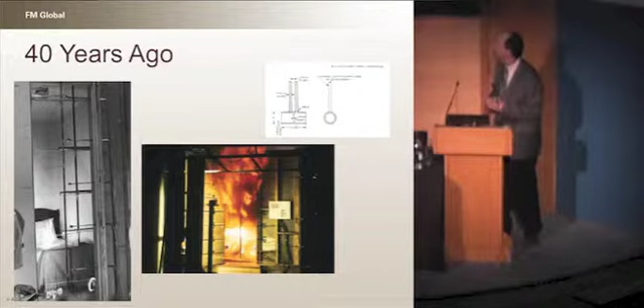I'm not going to try to go through an exhaustive review of CFD fire modeling. Instead, I'll mention that about 40 years ago, a set of experiments were done called the Harvard home fire experiments. They were the basis for the first well-known zone model, called the Harvard zone model. So what I'm going to do is talk about where we are as a company since then.

At that time, this is what our research facility looked like - the FM Global Test Center out in the woods of Rhode Island. This is what it looks like now. It's a little bigger, a lot busier.

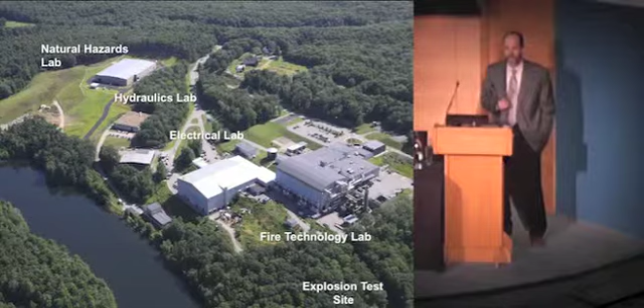The reason for that expansion is that fire protection today, whether in our standards or any other standard, is still largely based on full-scale tests. That's the way it is - you want to set a fire protection standard, you have to set it up, build it, burn it, and show that it works.

So here's the challenge: taking a simple thing like warehouse storage, if you look at all the variables involved - different ceiling heights, materials stored, aisle widths, how those things can be configured - and I take my most productive year at this facility, where we did 300 large-scale fire tests in one year, and look at all the variables in this problem, it's going to take 35 years to do all those tests if I do one for every possible combination.

That's not sustainable, right? So the way we do it now is we test what we can, use judgment, try to fill in the blanks, but the challenge is that industry's moving forward a lot faster than that. New things are being stored in new ways, in new buildings with lighter construction, more plastic, and we've got to stay on top of that problem.

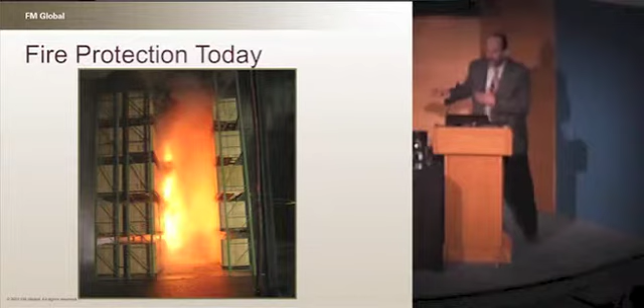Okay, so that's really our motivation for doing fire modeling. And the work you're going to see here is not mine. If I use the restaurant analogy, which I've used in the past, you're not getting the master chef talking to you about the meal. The master chefs are all at another meeting in Norwood, Massachusetts. You're getting the guy that printed the menu. All right, so that's the message. I'm presenting the work of a lot of other people. I won't be able to acknowledge them all along the way, so just go into that with that understanding.

So the goal is to perform better tests. The first thing we did 9 years ago when we were looking at this problem was improve our experimental test quality. We're the only large-scale test facility that controls moisture content of the material very tightly. Makes a big difference. We made a lot of improvements in terms of our test quality. The goal now is to be able to do fewer tests and do them smarter, and of course, provide deeper knowledge, engage and advance the community.

About 9 years ago, I did kind of a survey of all of our academic partners. Edinburgh was one of them. And I really took a message home from Edinburgh that stuck, which is I heard from Jose and his colleagues that what they really need is a platform on which to do fundamental research where they can publish their results in high-quality journals. I compare and contrast that with what John said this morning, which is there's hundreds and hundreds of tests and correlations on a certain problem, but there's not a lot of knowledge on it. So we need to move beyond that. We need to engage and advance the community to improve the rigor and fidelity and the trajectory of making advances in fire science.

So that's part of the underlying driver for what we're doing here and kind of our strategy. And then ultimately to provide better protection. And better in this case means not only does it work, but the big issue for any kind of fire protection or fire safety issue is cost. Very rarely are you going to improve a commercial industrial property owner's profitability by a better protection system in the short run. In the long run, absolutely you will. Not only will they have fewer losses, they don't have the deductibles to pay, they don't have their insurance issues to deal with, they don't lose market share, they don't lose shareholder value, they don't lose employees, they don't end up in the nightly news, all those things that go along with reducing losses. Those are long-term benefits. The short-term challenge is how do you provide that protection cost effectively?

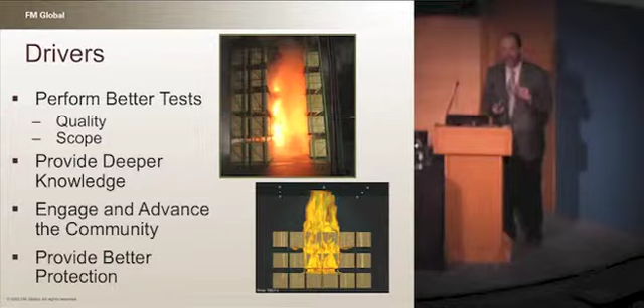So hopefully I set the stage for the fire modeling program we put in place in 2008. We made investments in staff and scientific computing. Our board of directors approved it. Our fire modeling objective was to reduce the number of large-scale tests needed to protect some simple storage. Basically what we call Class 2 commodity, which is a metal box with 3 to 6 layers of corrugated container board around it. Corrugated container board is a nice way of saying cardboard. So it represents an appliance being shipped or stored in a warehouse. Then down the road, we want to be able to have some predictive modeling capabilities for some applications. Not everything, but for some.

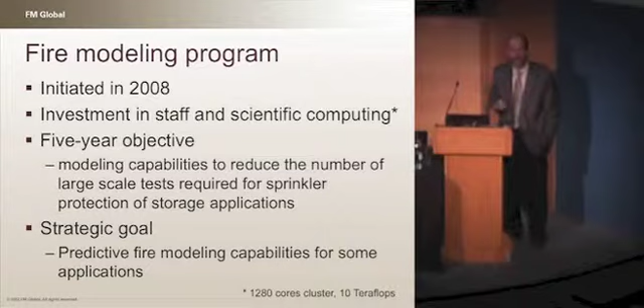So at the time, we looked at the challenge and the team that was responsible for this. Obviously, it's multi-physics, multi-scale. I don't need to go through that for this audience. But the basics is we need to calculate the fire growth and we need to calculate the efficacy of different protection strategies. And we started by just tackling the simple warehouse problem, just because of the magnitude that I talked about.

Now, it's not like we're burning down warehouses every day, thankfully not. Part of the reason for attacking that problem is it's pretty well defined in scope. It has a lot of the features of key geometry. There's a lot of business value in warehouses. When a company loses their warehouse, they have to overcome that. We have a lot of things that we ask our clients to do to protect their storage and warehouse that's a hassle for them. So if we can alleviate some of those issues, then we're ahead of that. And it's also just a good canonical problem to start with, a little simpler. So that's where I'm going to start.

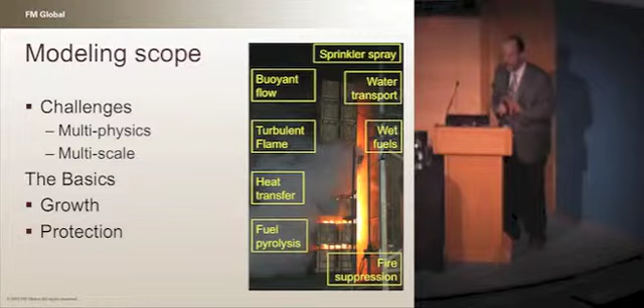Warehouse is not the end goal, but that's certainly our starting place. At the time, we used FDS and commercial codes, a number of different commercial codes. So we had a first strategic decision to make: were we, in accomplishing those goals, going to try and build upon those, or do something different? This was a big driver.

If you look at computing performance, you've probably heard of Moore's Law, and it's really played out. You can do now on your laptop what used to take a supercomputer to do. It's not slowing down.

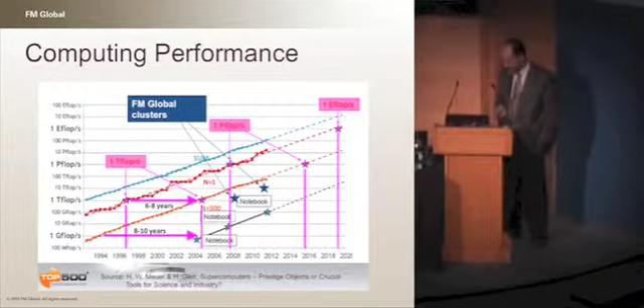We didn't want to build something for today, we wanted to build something for the future. Computing was not the big issue for us. We're not going to build something that runs on a laptop. Our strategy is that you, the students out there, are going to have computing resources that far exceed anything we've ever had, and we don't anticipate that's going to slow down. So we're not limiting our strategy to a laptop, and discussions moving forward shouldn't be limited to that context either. We need to think beyond that. This is the trajectory we're on, and it's showing no signs of slowing down.

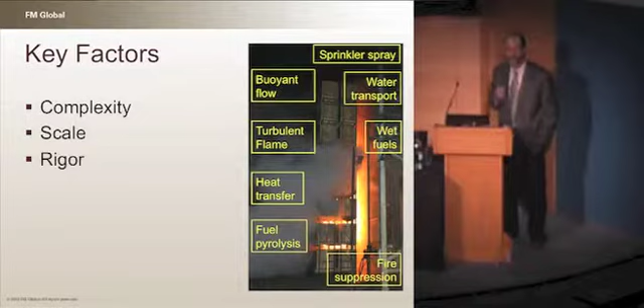The other key factor is complexity. Obviously we want to move beyond warehouses. Even a warehouse is tens or even hundreds of thousands of square meters, so we need to represent that size. And the rigor from a scientific perspective, all the physics we need to capture, requires a higher fidelity model.

So we chose to start with an OpenFOAM toolbox. This was developed by Imperial College, and it's supported by OpenCFD, available through OpenCFD. Our strategy was to develop the key models and call it FireFoam. I wanted to call it OpenFire, but people thought that sounded bad, so we ended up calling it FireFoam.

The idea was only to develop the key submodels needed to build upon that platform, which has a very good solver, a set of solvers, a maintenance program, and availability, to accomplish those objectives: better protection, moving the community forward, and being able to solve the kinds of problems we need to solve in the future.

It also gives some acceptance, and helped our cooperation with academia and industry. We didn't have any licensing agreements, we have this model available. If you go to fmglobal.com/modeling, anybody can download it. Our folks here at Edinburgh can develop submodels for it, as they have in the past.

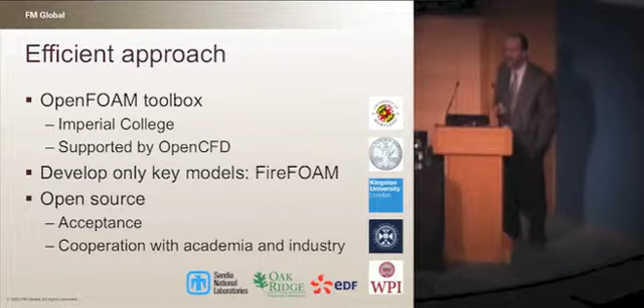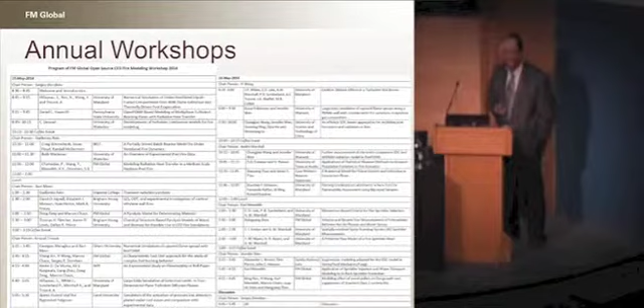So that was our strategy in terms of moving forward with making a selection for a fire model. We have annual workshops. Unfortunately, or maybe fortunately for me, this year that workshop was announced on the same day as this meeting, so all the folks that do the heavy lifting are at that workshop instead. So I get a chance to come here, hang out with you, have a nice dinner, and learn a lot. But that's where the knowledge is shared between the community working on moving this model forward.

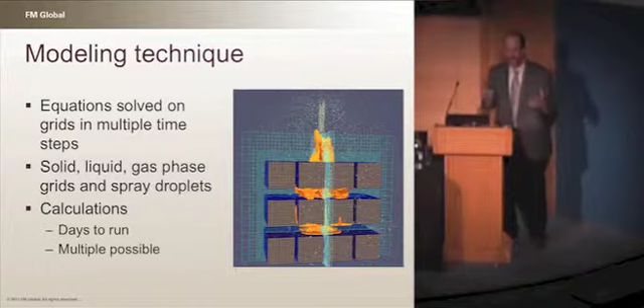The rest of this I'll go through pretty quickly. It's a CFD model, equations solved on grids and time steps. We use separate grids for the solid, gas, and liquid. The spray droplets are modeled using Lagrangian transport. Right now, for a warehouse calculation, it takes on the order of days to run. We have about a 12 teraflop machine, but the nice thing is you can run 4 or 5 scenarios at one time, so in a few days you get an ensemble of results you can use to make decisions.

Our milestones are as follows: we started with the buoyant plume.

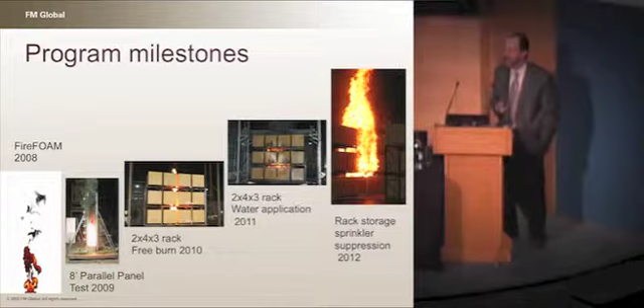Then we used the 8-foot parallel panel test in 2009. Then we used a simplified 2x4x3 rack storage, free burn, in 2010. Then some free burn with water application at a prescribed rate on top, and then the rack storage sprinkler suppression. I'm going to walk you through these, kind of how we did along each step.

We use a pyrolysis model that's built on the FPA, basically fuel properties from bench scale. We have a material decomposition modeling approach that was developed in part here at Edinburgh. And then the validation for fire growth is in the parallel panel and in the rack storage case.

So this is an opportunity for those of you developing models to develop them in a way that allows them to be used by others. Developing pyrolysis models in some standard way helps those models to be used by others for calculations using the same material.

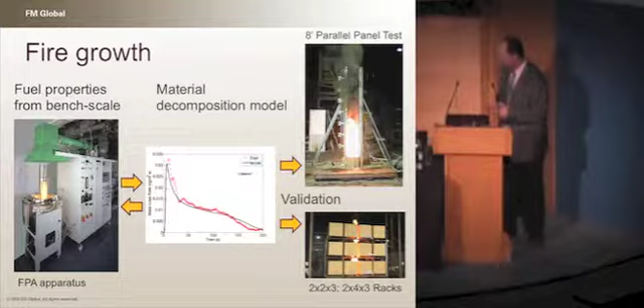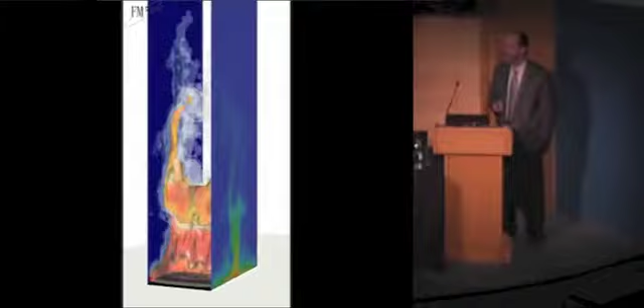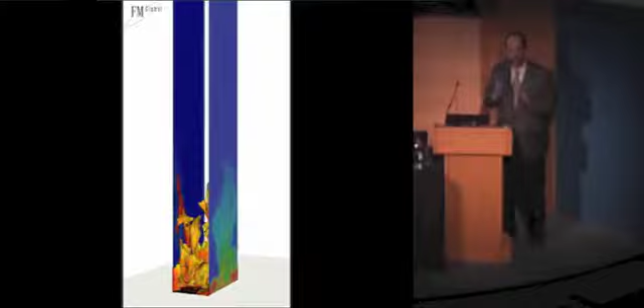The parallel panel test is an important one for us. This really captures one of the things Patrick was mentioning. This is the way we started testing and certifying wall panels. We used to use a big corner test, a 25 by 50-foot corner test. We don't do that except in very rare cases now. This is either an 8-foot or 16-foot setup, two panels put together facing each other, which replicates the radiative environment of a corner.

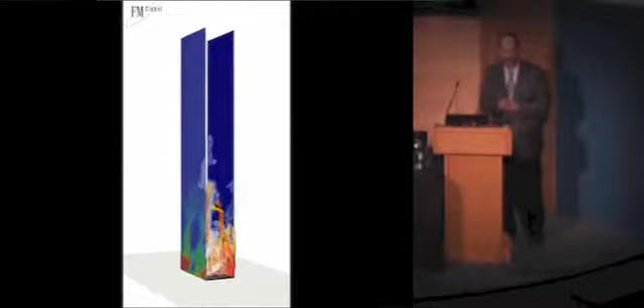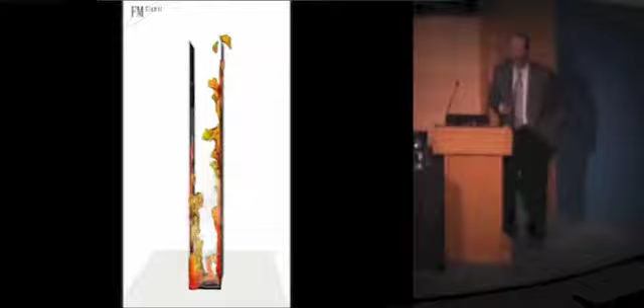And you can put the seam of a sandwich panel right in the center, so you can capture those kinds of things. It's easy to capture in terms of boundary conditions—it's a simple geometry, well-controlled boundary conditions, a good canonical problem. You can see how we started off just modeling flame spread through parallel, clean geometries.

Our next step was to be able to do rack storage. So we developed the basic pyrolysis model for corrugated container board, then applied it in a more complex scenario. You can see the tests—there are two different configurations. Tests on the right, model on the left.

The first thing is the view graph test, right? The first is view graph validation. If it doesn't validate on view graphs, it's not going to validate in numbers. So this is necessary but not sufficient for validation. You can see the flame spread rates are about right—the propagation of flame through the material is about right.

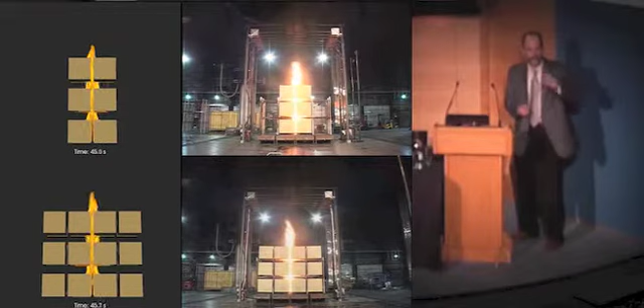This is what we call simplified class 2. It's basically boxes sitting on single points, so we don't have the complication of the heat sink back into the rack. I'll talk about where we've gone beyond that in just a minute.

You see that the basic flame structure is okay. What we're rendering on the left-hand side is the envelope of the mixture fraction space needed for combustion, so we get some fairly good view graph norm comparison. And the heat release rate, at least the fire growth rate, is pretty good.

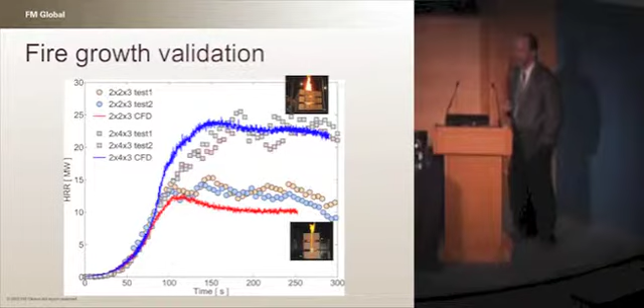Now, later on in the fire, when you start to get a lot of geometric changes, the comparison breaks down. But for us, in terms of looking at effective protection, the most important part is that initial growth phase. That's the key part to capture, because that's going to determine when sprinklers activate and how effective they're going to be.

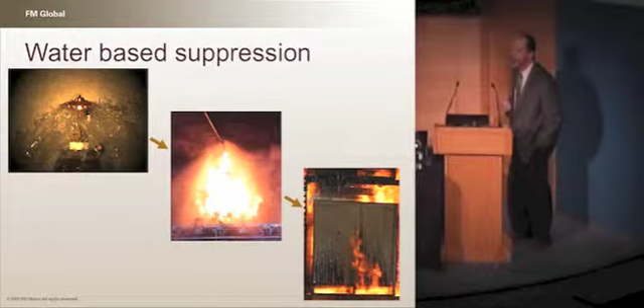So the next step is to use sprinkler protection as the first metric. It's still the most widely used protection mechanism specifically for warehouses. The idea is to look at the sprinkler discharge, the discharge of those droplets through a flame zone, and then look at the transport of that water onto some burning material. Those are the three basic steps required.

We used a technique, working with the University of Maryland, to characterize selected sprinklers—basically getting the flux, the droplet size, and the number density with a combination of collector pans and laser diagnostics. That allows us to track the droplets through the domain. So we don't try to go up to the sprinkler itself; we draw a boundary around it on the order of 0.5 meter in hemisphere, then specify the flux and those parameters at that level, and track the droplets using a Lagrangian particle tracking technique through the space.

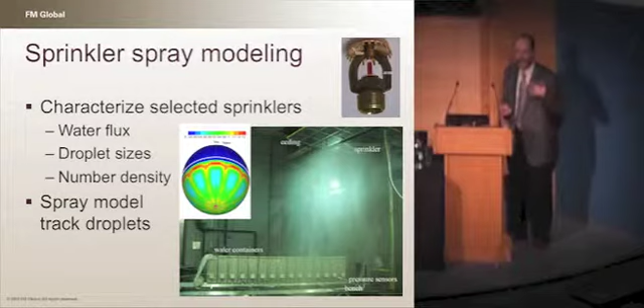So you have a K14 sprinkler at some pressure. You set it up, make this measurement, and that is what goes into your model. The first validation was: can we get the actual delivered density correct? This is the density that gets through the flame zone to the top of the burning material.

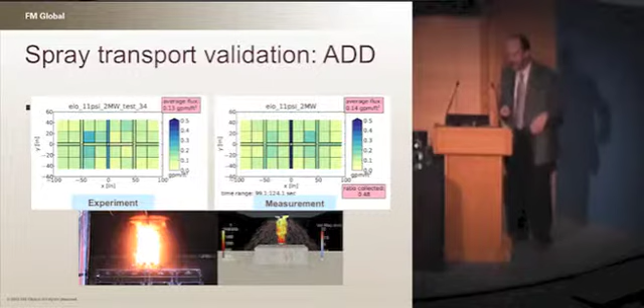You can see the comparison here of experiments and measurements. That's basically testing the Lagrangian particle tracking algorithm, the evaporation algorithm.

The hardest part of this, and we knew this to begin with, was going to be what happens when the droplet hits the material. What do you do then? There's a fair amount of different options there, a fair amount of physics there. None of them are necessarily new physics, and I think this is characteristic of fire protection engineering in general. There's not a whole lot of new physics. It's just a combination of physics and the complexity that makes it challenging.

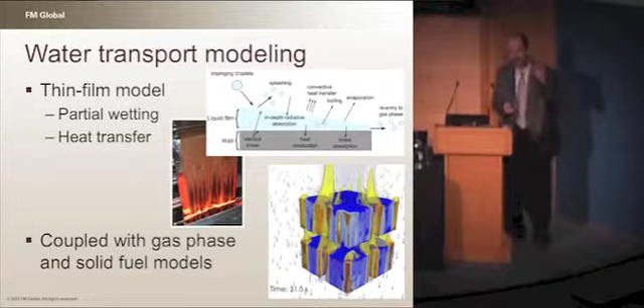So we looked at partial wetting and the heat transfer from that with a thin film model, and then coupled that with the gas phase and solid fuel models to see what happens after a droplet hits the surface, partially wets the surface, then where does it go next? There's kind of three basic cases: the thin film flow, which is a Nusselt solution, the partial wetting, which happens when that liquid starts to evaporate, surface tension pulls it together in rivulets, and then there's the transport from tier to tier.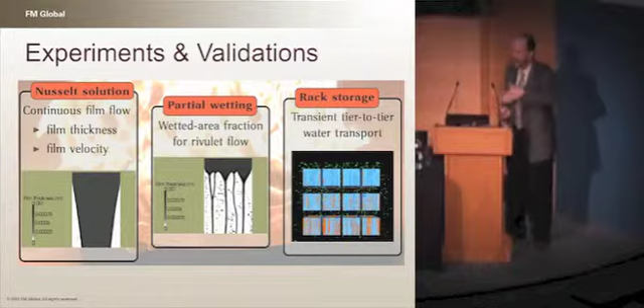So if I have water flowing down the face of a box, what happens when it gets to the bottom? Some of those droplets, by surface tension, attract and go along the bottom. Some of them go some distance and fall down. Some of them drip down. Some of that water just washes down.

So here's the combination of the models that were put together by Karl Meredith. He's actually our technical team leader for the fire modeling. He has reports to a group manager, Yi Wang, and Sergei Dorofeev is the area director for this area.

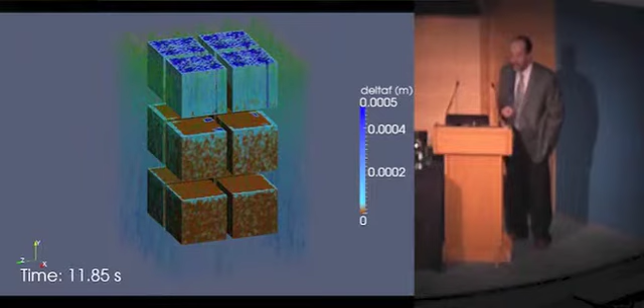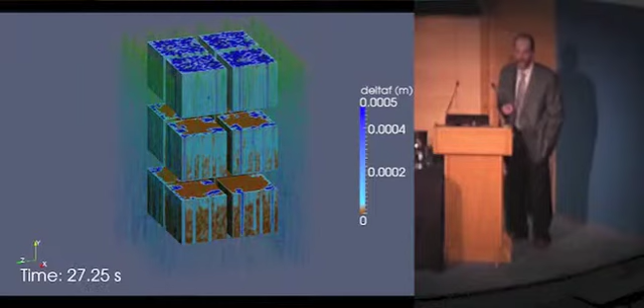So you can see the droplets, and this is a prescribed flux of droplets hitting the depth of the water layers represented by the tones here. You can see the pooling on top, the transport over the corners, the rivulet flow down the side, and the dripping off the corner.

And so we validated this for a number of steps through some intermediate scale experiments, as well as some kind of combined experiments. And just like the home fire project back 40 years ago, where they did experiments for discovery, then they developed a model, and then they did more experiments to compare the model. Basically the same approach for all these.

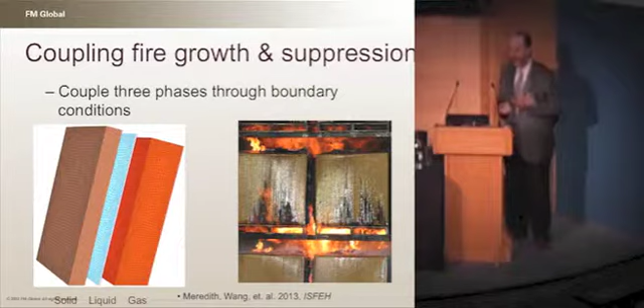We use three different meshes. We have a mesh for the solid that does the heat transfer, a mesh for the liquid that does the thin film transport, and then, of course, the gas mesh for the fire itself.

So here's when we put it all together for a simple material. Here's what it looks like. We have two different sprinklers in this case. We use a sprinkler activation model, which is a simple heat transfer model. You can see the little dots up on the left in the model. Those are our sprinklers installed in the ceiling. We just calculate the convective flow and use the response time index to trigger when those sprinklers are going to open.

So it's very similar to the fire growth case you saw before, but now you're going to see sprinkler activation, for a couple different sprinklers running at different pressures, and the transport of the droplets and the effectiveness of those droplets in terms of achieving fire suppression. So it takes a few minutes to develop. You can see that a sprinkler at the top, which is a K14 ESFR, it's an early suppression fast response pendant sprinkler. You can see the droplets.

That windowing or the striping is a rendering artifact, a consequence of the rendering. That's not a calculated feature. You can see it's like pulsing, the spray looks like it's pulsing. You see the transport down the boxes, the rivulet formation, and you can see it really in both cases. The test is a little harder to see because the rivulets are a little more difficult to see with the glare from the light.

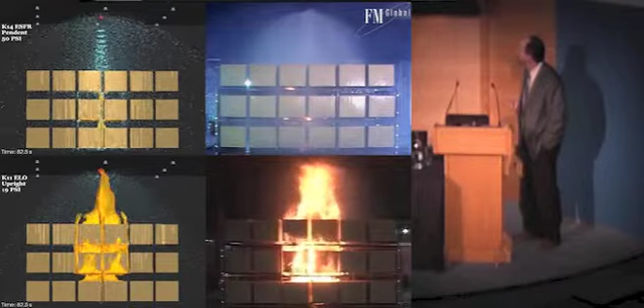Subsequent activation then has not occurred. Actually, you can see that one K14 ESFR is controlling the fire quite well in the top. But you will see subsequent activation on the bottom, which is the K11 ELO running at a little lower pressure.

The one thing we haven't tackled here is sprinkler skipping: the advection of the droplets from one sprinkler to another sprinkler and wetting that sprinkler link. We haven't tackled that problem yet. That's something we need to tackle, or the community needs to tackle, because what it does is drive up protection requirements.

When you put a safety margin in to account for the fact that those sprinklers are going to skip, it drives up protection requirements, so you see additional activation down below. We basically compare heat release rate, sprinkler activation rates from tested experiments as the ultimate validation, numerical validation. Of course, the first thing is, do you get suppression in one case and not suppression in the other?

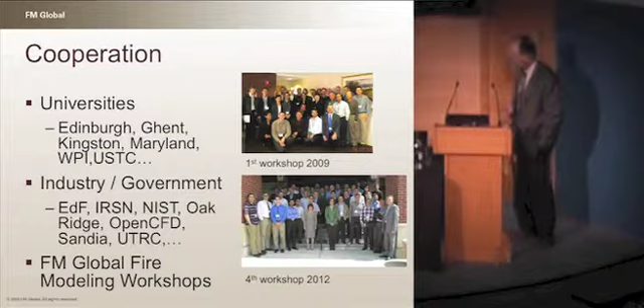This is the strategy we've taken to start test planning now. When we're looking at these materials, we'll run pre-test calculations. We also use statistical design of experiments to map out the test matrix. Our cooperation involves too many folks to mention, but these are the folks that have traditionally been involved in the workshop. There was the 4th workshop in 2012, the 5th workshop, and we're on the 6th one this year.

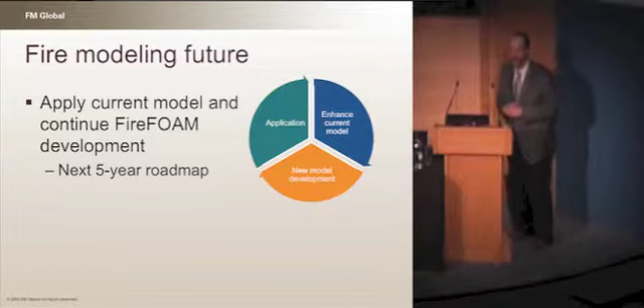So in terms of looking forward, what are we doing now? What are the opportunities for this group, and how can we best work together? We've completed that 5-year plan. We have the ability to model fire and suppression in simple warehouse configurations, reducing our test burden there. We're going to split our next 5 years based on applications, which I'll show you a few of, enhancing current models through research opportunities, and new model development for physics pieces that aren't there yet.

One of the challenges we face now, as a community, is the notion that space is important, and when space footprint gets important, what happens? People build up. So we now have materials stored in 60, 80, 100-foot tall warehouses, whereas 5-10 years ago that never would have happened. Our research campus, which I think there's one at TFRI that goes a little higher, is the tallest large-scale test facility regularly operating, at 60 feet.

So we're going to need to extrapolate protection to those levels, specifically in things like roll paper, where you can't mount them in racks and put in-rack sprinkler protection on it. In-rack sprinkler protection is the second option for warehouse storage, but nobody likes it except sprinkler manufacturers. They sell more sprinklers that way, but clients don't like it, warehouses don't like it because they get hit with forklifts. There are all kinds of issues associated with them getting broken off, plus additional expense, both in installation and maintaining the water supply.

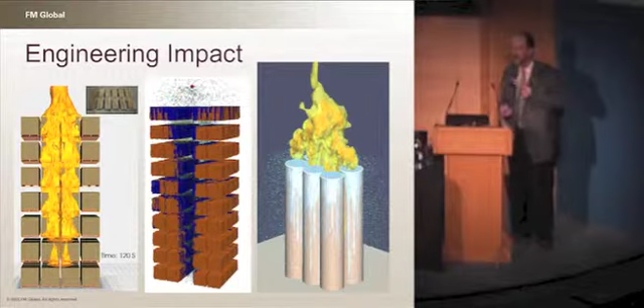So design of in-rack sprinklers, testing of roll paper, whose properties were developed using the same approach, is some of what we're working on now that will go into protection measures for those applications. We'll do design of experiments, limited tests, validation, and they go into protection in our standards.

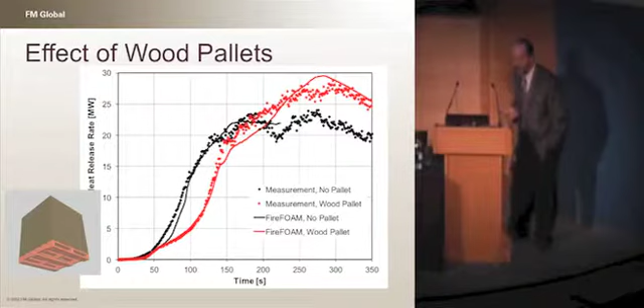One of the things we just recently achieved, which I skipped over a minute ago, was adding the effect of wood pallets underneath the material this year. It's kind of interesting - if you look at the plot, the red line is the fire growth rate with a wood pallet. It turns out if you just put the bare box without wood underneath it, that corrugated container board, that cardboard, ignites very quickly and produces a lot of flame spread across the bottom. The wood pallet initially lowers the fire growth rate. Now, later when that wood gets involved, you see the heat release rate go up. That's something that at first the folks plotting the data thought maybe they'd made a mistake. Higher storage I already mentioned - these are just comparisons of heat release rate with time, with modeling experiments.

One of the challenges we face is lighter plastics. This is what we call uncartoned expanded plastic. Lighter plastics are making their way into everything - things that used to be metal are now plastic. The lighter the plastic, the higher the fire risk. So this is what it looks like for a typical grocery store meat tray. That's the mesh.

This is a high storage of that material with one row of in-racks at 30 feet. Currently our standards say that to protect that, you have to, every 10 feet, put in a row of in-racks. So we're trying to see if we can push that limit and put larger sprinklers more strategically placed up at higher elevations to reduce the cost and burden for our clients.

Here's the way we're using that to supplement the model to supplement tests. We have a simulation of the water flux to the bottom of the tier. This is the water that gets to the seat of the fire - it's not the density at the top, it's not the design density. And we have tests that we've done where we just release water in the same fashion to the bottom and measure it in the laboratory, so no fire test, just to make sure we have the water transport correct.

That's really the root of the issue. If you get water to the right place at the right time, you're going to have effective protection. So, in the spirit of...

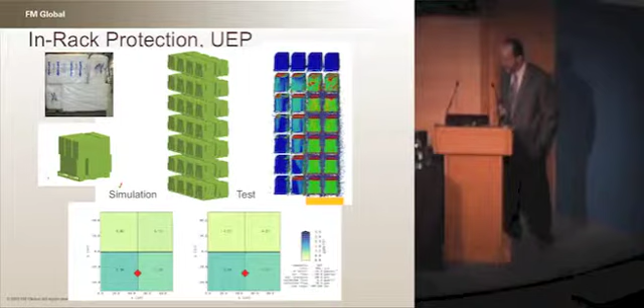The test is reality, partially revealed - because you do a test, you only get so much data. A model is a lie, because you're never going to represent everything, but it's fully revealed. You can dig in and find out what the problems are with your model by examining every variable in time and space.

And we can use this information and then go back into the laboratory and do intermediate scale tests to find out how much water we have to deliver to the bottom of that storage for us to achieve effective protection. So we do intermediate scale tests where we have a well-controlled application of water to the top of the storage, not sprinkler control, but well-controlled application of water to the top. And we define the threshold where you have an insufficient or sufficient water flux.

The good news is in the bottom, you can see there's a lot of deviation between insufficient and sufficient. So that means you've got a big threshold, you've got a nice wide place to capture. The top is a little harder, and so with higher storage, it becomes a little more challenging. Nonetheless, we can use this.

We go into the laboratory and test those scenarios. We've tested on both ends, and the ones that were predicted by this approach as being sufficient were indeed sufficient protection. The ones that were expected to be insufficient were insufficient protection.

Now, what we haven't done, because these are expensive, time-consuming tests, is go back and see how close we can get to the margin. With safety factors in place, which there should always be safety factors, and this being an academic problem, I'm not sure it makes sense for us to do that, but we certainly would like to know what the uncertainty is around some of those margins as we move forward.

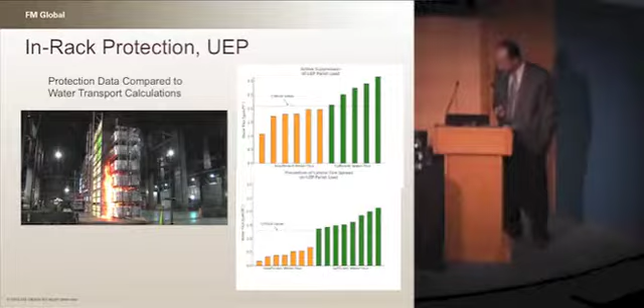So the benefits - hopefully what this kind of capability and this kind of approach and this strategy that we took, that everybody's a part of in the community, is reducing the number of large-scale tests for a specific problem. So with that in-rack storage application, rather than doing a minimum of 4 to 6 tests, we did 2.

We did all the calculations. We understand the density at the bottom. We did one that we thought was going to be okay and one that we thought was not going to be okay. And we have something that we have a lot more confidence in.

And of course, we can use that for maybe a little shorter, a little taller storage. We've used it to represent what happens if you pull a few pallet loads out - what happens if you have an open space? Is that better or worse? What happens if you increase the flue space or the aisle space?

So ultimately, better, more reliable protection guidelines - not reliability in the sense of systematic reliability, but reliability in terms of we have information that will lead us to a protection point which we can put in our standards and ultimately get adopted, hopefully by others.

Faster turnaround of support projects. We insure 1 in 3 of the Fortune 1000, everything from amusement parks to semiconductor fabrication facilities, and they come up with some weird stuff. So we have a tool that we can use to address some of those problems.

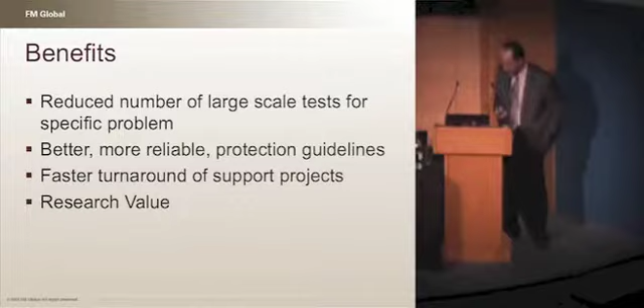That's certainly a benefit. I think the most important thing, if we think about it, is hopefully we do have a platform now, and the partners that we've worked with so far in the university here can see some research value. We see combustion and flame publications and things that are coming out, which is really the metric of success for universities and researchers. So we've seen that kind of come together.

This is the slide that I always end with. When I talk to audiences about this, they say, well, are you just going to model everything from now on? Well, the answer is no, I don't think so.

My tenure will not be as long nor as distinguished as John de Ris's, but in my tenure, I don't think it's ever going to happen. That's certainly not the plan. I think the goal is to complement test data, using the data as the truth partially revealed and the model as a lie fully revealed.

There's certainly a lot of value in being able to do things smarter. This is the strategy we've taken. Hopefully this group can see you were a part of that strategy, and you can see now the ability to carry that strategy forward. Be part of the research team that's developing capabilities, putting it in the model, and be part of the group of users that downloads the model and uses it, and validates it for their application, because the model's never going to be validated. The model is the model. When you apply it to a problem, you validate it for your application, and use it to meet their needs. So with that, hopefully I've left a couple minutes for questions.

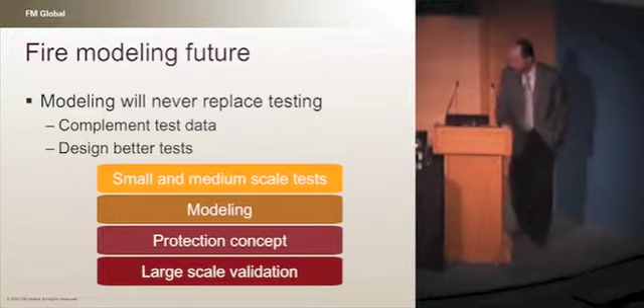My guess is at this point, you're still doing 300 tests a year, probably learning more than you did before. Has it changed your instrumentation? I know you mentioned that you're conditioning your cardboard now, and that's obviously an improvement. Have you changed other things in the way you do tests that came out of that?

Yeah, good question, Greg, and you're right. We've still got about a year backlog at the Large Burn Lab. We're still doing as many tests. So my commitment was never to reduce the number of tests in total.

And it has changed some of the diagnostics. It hasn't made its way to the standard tests that we use to test and certify products like sprinklers. But certainly in terms of the tests that we do to develop new protection measures, we're starting to take more velocity measurements than we have in the past. Taking temperature measurements inside the commodity, so we can start to assess the solid material response, and so it is pushing us to a better place experimentally as well.

And then we've done some simple kind of global things about test quality as well. I mentioned moisture content. We kind of have a box of ambient temperature and moisture content around which we will do tests so that we can call them equivalent to each other. We've established that. And for our standard commodity, our corrugated material, we have like 27 parameters that we check to make sure that when we burn corrugated container board, it's the same corrugated container board that we burned last time. Because if you're using that for validation experiments...